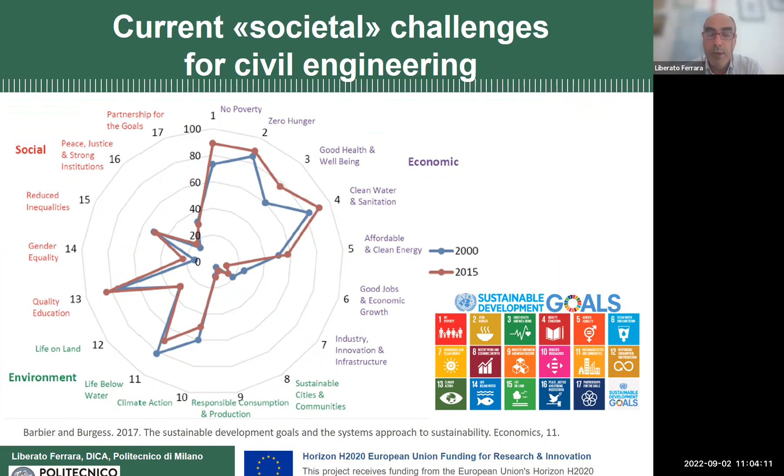Just to frame the topic: it's quite well known that we are all now targeted to these sustainable development goals by the United Nations. So I've started thinking for some time, what could be our role as civil engineers to contribute to these sustainable development goals? Some of them are quite obvious — you can go into SDG number 7, industry, innovation, and infrastructures. But as a matter of fact, there are quite some contributions we can give as civil engineers to all of these SDGs. So I will say these are challenges for civil engineers, but also for us as educators, to think about what could be our contribution to these new societal challenges.

Recently, the European Union issued this objective, the new taxonomy environmental objectives, and they are dramatically urgent. You see: climate change mitigation and adaptation, sustainable use and protection of water and marine resources, transition to circular economy, prevention of pollution, and protection of biodiversity and ecosystems.

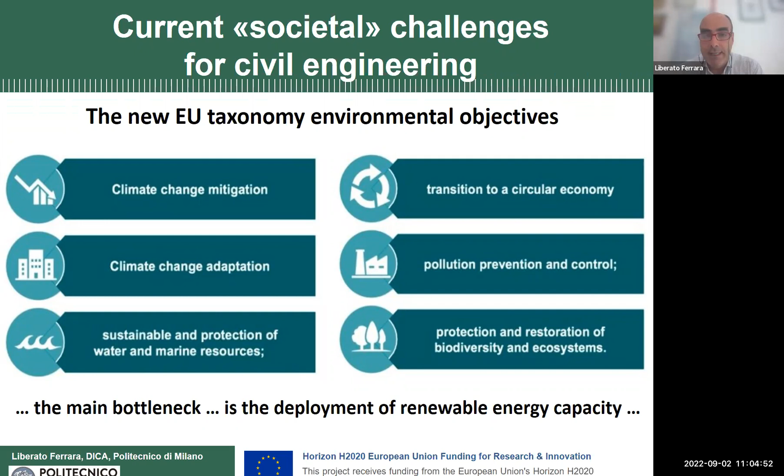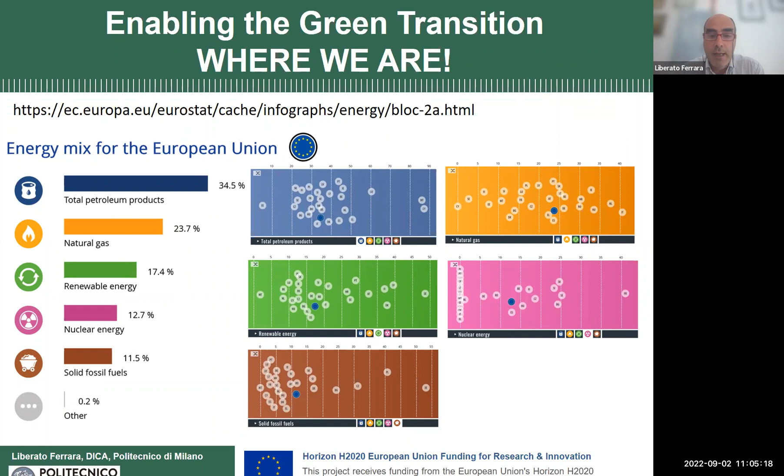Actually, there are several bottlenecks to this, but one of the main ones identified is the deployment of renewable energy capacity. When we look at this — these are European Union data — what is the current situation, the current energy mix for European Union energy? These are quite recent results, and you can see that less than 20% of our energy in Europe comes from that. There are differences among member states, but there is still quite some work to be done.

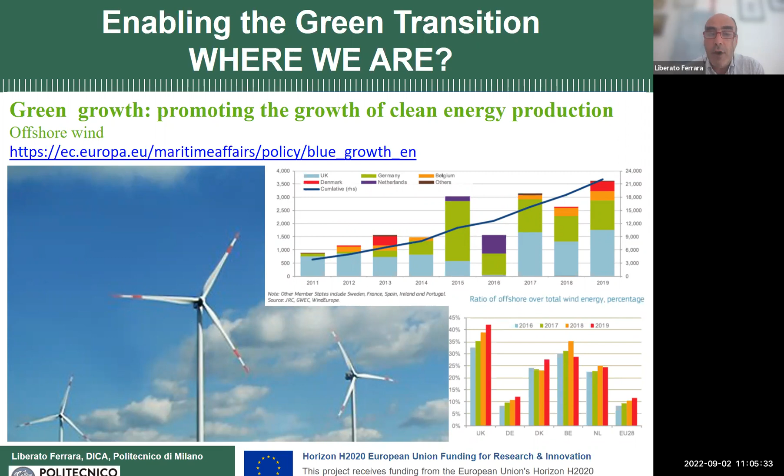Well, surely we can bring in ideas, concepts, and design methodologies about new materials, but these new materials should not only be better performing from the mechanical and durability point of view — they should likely enable us to think about the structural concept in a different way.

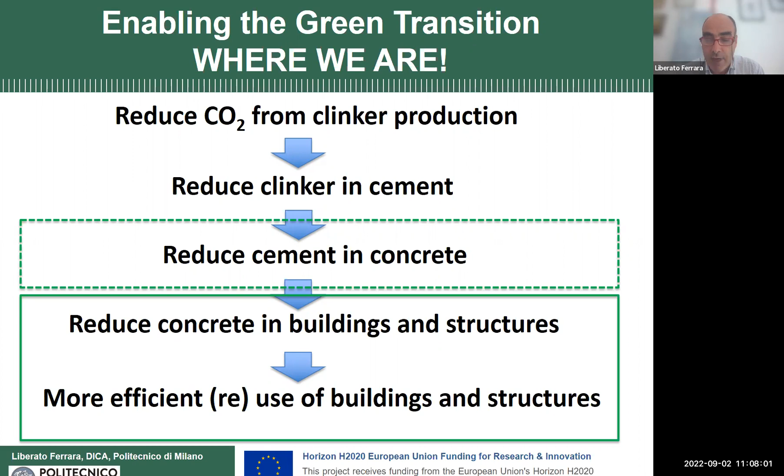So when we have talked about offshore wind, we have talked about geothermal, all these applications are in extremely aggressive environments. If we go to the sea, we know that we have chlorides; in geothermal drilling, but also in infrastructures, we may have chlorides and sulfates. So all these structures and the materials they are made of are exposed to extremely aggressive operational conditions, which include the chlorides, the sulfates, the environmental, but also the structural service scenario. We must not forget that there is a combined mechanical and environmental stress on our structures that we have to think of.

These are examples of structures which were built very recently, not more than 10 or 15 years ago. So we can really assume that these were built according to the most recent code specifications. And you can see the severe degradation that they have suffered in sea and geothermal environments.

Another aspect to consider: look at the picture in the bottom left of the slide. This is a raft for mussel farming in the Atlantic Ocean, close to the northern Spain coast. After a sea storm, the raft was completely destroyed. So the factory, the people running it, lost the infrastructure, but they also lost the harvest. It's a huge economic loss that we have to consider.

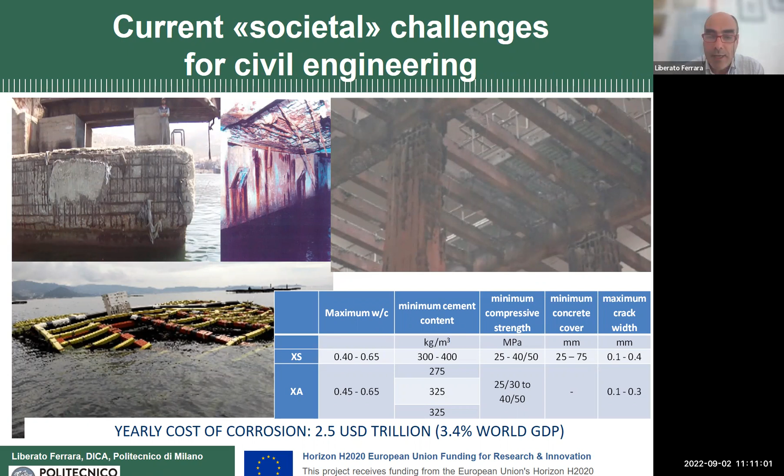So this was the context in which we started working together, answering a specific challenge issued by the European Union, for the call to which we applied and won with this ReSHEAlience project. It was about improved durability of materials in buildings and infrastructures, including offshore. We gave our project the short name ReSHEAlience, playing with 'SHEAL', because we worked with materials which have the self-healing functionality embedded in them. We believe this was a way to extend the service life of the structure, giving the materials the capacity to self-repair in a combined state of mechanical, environmental and chemically aggressive scenario.

The project has just terminated; we finished at the end of March 2022. We were 14 partners in the beginning. We lost one partner midway, but in the end we continued with 13 partners and 3 linked third parties from 8 different European countries, and the budget of the project was 5.5 million euros. These are the partners.

I had the privilege to be the coordinator of this project. We had 5 other universities or research institutes. We have from Spain, University of Valencia and CSIC. We have Technical University of Dresden from Germany, University of Malta, and Ben Gurion University of the Negev from Israel.

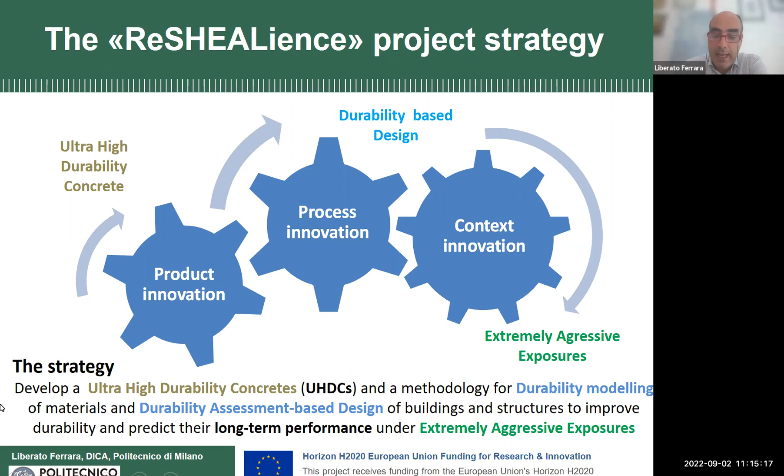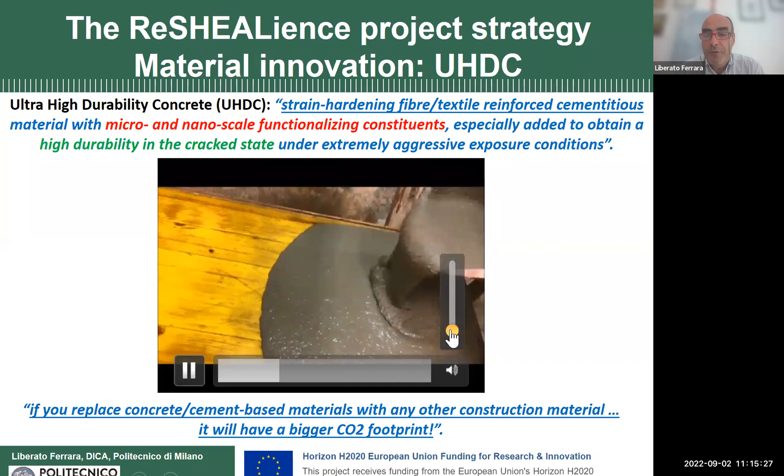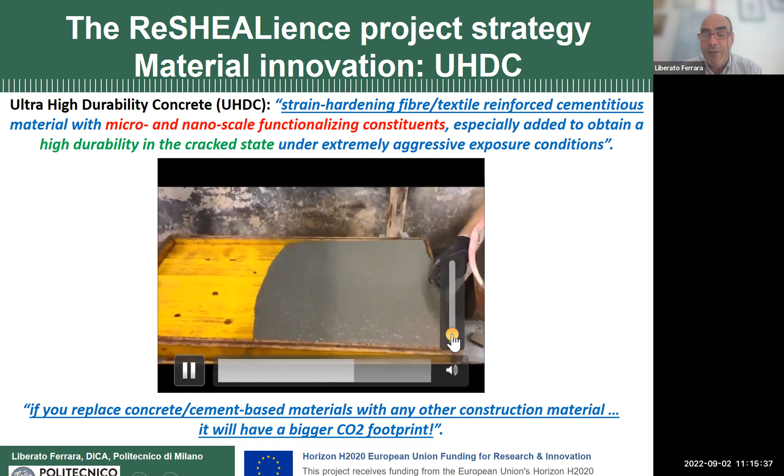So we started, as I say, from ultra-high performance concrete. Ultra-high performance concrete is a material that's quite well known in university labs worldwide. It's quite well known also on the market, but so far it's also regarded as a material for niche application, considered somewhat a luxury product, branded and so on.

So what we wanted was to say, okay, look, there is not a unique ultra-high performance concrete. It's a material that has to be designed for the specific application that you have in mind. And if you want to look at the CO2 footprint, consider also that you must have the possibility to produce it with locally available constituents. It has to be done with what you have in the local situation.

Our ultra-high durability concrete, we defined it as a strain hardening fiber or textile reinforced cement-based material. And we wanted to upgrade its functionality, incorporating micro and nanoscale constituents, having as a target the improvement of the durability in the cracked state.

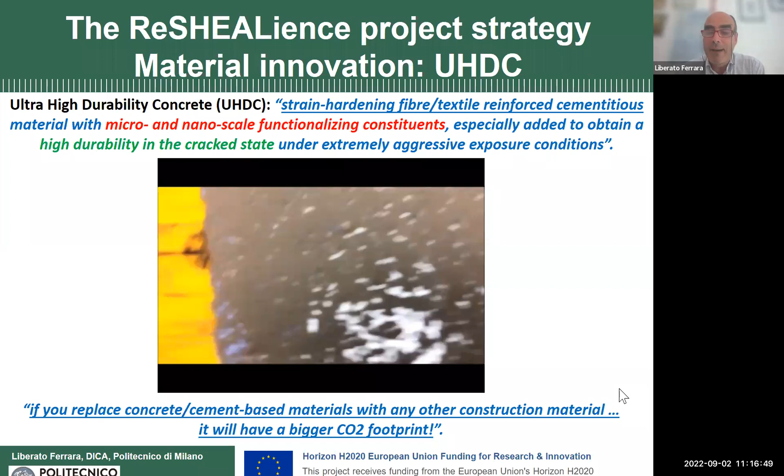And also having in mind another very important message: if we replace concrete or cement-based materials with any other construction materials, we will have a bigger CO2 footprint.

So then we went from the lab to the construction site. This is an ultra-high performance concrete cast on site by a regular construction company, trained to do this, so there is nothing exotic in doing this. And you can see the remarkable fresh state performance that we achieved on the site.

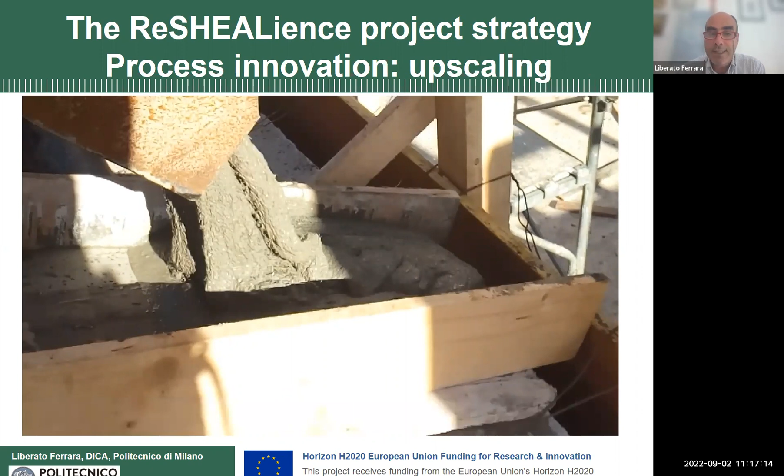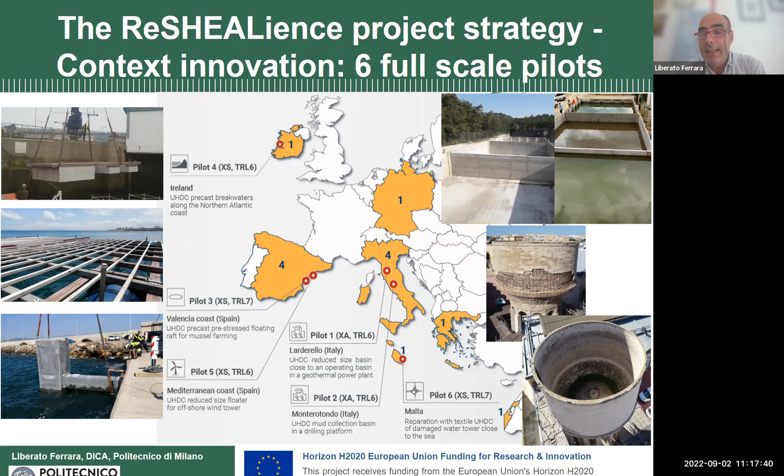This was at a pilot site that Enel Green Power made available for the construction of one of the 6 pilots of this project. Actually, we have 2 pilots that have been built; they are now in operation and under monitoring. We have 2 pilots in Italy, 2 pilots in Spain, 1 in Ireland, and all these 5 are new structures. In Malta, we have a very interesting project for the retrofitting of an existing reinforced concrete heritage structure. These are some images of the pilots and of the consortium that we visited. We will look at them in better detail later.

But going back to the message that I was delivering before, for each of these pilots, we did not have obviously the same material.

We could not have that because the conditions are different. The performance demands, both in terms of structural and environmental requirements, can be different. And the local markets are different.

For example, for the Enel Green Power project, one of the requirements was resistance to sulfate attack. So we used blast furnace slag as a supplementary cementitious material. But blast furnace slag was not easy to find in the Spanish market. So in that other case, silica fume was used as the supplementary cementitious material.

And we also have different kinds of applications because we could have discrete fibers in the form of steel fibers or other types of fibers. But in the case of the Irish pilot and the Malta pilot, we also used textile reinforcement, in different forms that we will see.

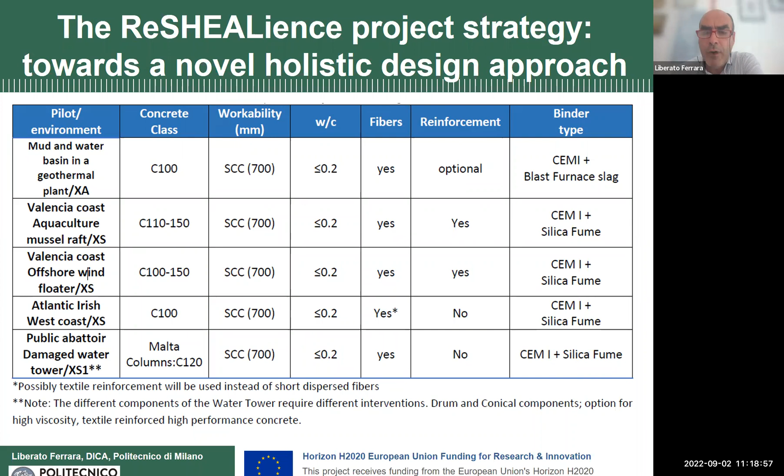These are some of the pilots that we built. These are some images from one of the Italian pilots.

This is a basin for containing geothermal water. Actually, the main intent is that it serves the cooling tower of a geothermal power plant. We built our pilot in 3 different tank compartments, each one with a different material or different structural concept.

In the farther distance from you, we have the ordinary reinforced concrete solution. If you look here on the top left, you can see that it is 10 centimeters thick to satisfy both the cover of the reinforcement requirements and some statical requisites.

Then we used one of our UHDC materials, and we built an absolutely identical tank compartment, but in this case, the thickness, as you can see from the middle picture on the top, was just 6 centimeters. So in the end, we are using 40% less material volume to build the same structure.

And then we said, okay, why don't we go for some site precasting? So we designed slabs to be then tilted up. You cast the slabs horizontally, tilt them up, and complete the basin, casting columns on site. We call them buttresses because they function more or less like the buttresses in a Romanesque cathedral.

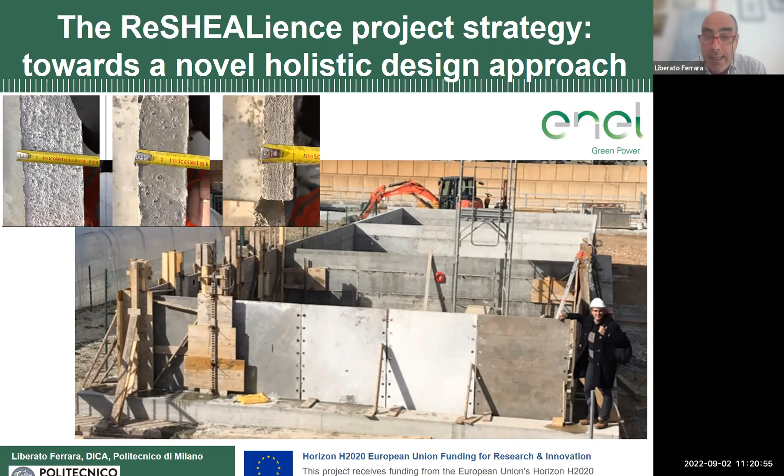And with this concept, you can see that the thickness of the slabs, of the walls of our basin, was just 3 centimeters. And it worked perfectly well.

You can see here the first load test that we made on the structure, filling them. Each of these tank compartments contains 50 cubic meters of water. You can see no signs of water leakage throughout the joints.

But most of all, if you look at this picture on the bottom right of your slide, you can see the first rectangle is the ordinary reinforced concrete after 2 years of exposure to cycles of emptying and filling the basin with this water, which is rich in sulfates. You can see that some erosion and leaching has started occurring, whereas you have no sign of leaching in the central part of the picture. This is our UHPC material.

So when you end up, I said one of the objectives is to reduce cement in concrete. And if you look at the mix design that we have employed, you see, oh my God, I have 600 kg per cubic meter of cement in my mix design. Whereas for regular concrete, I have 350 or so. So am I really reducing cement in concrete?

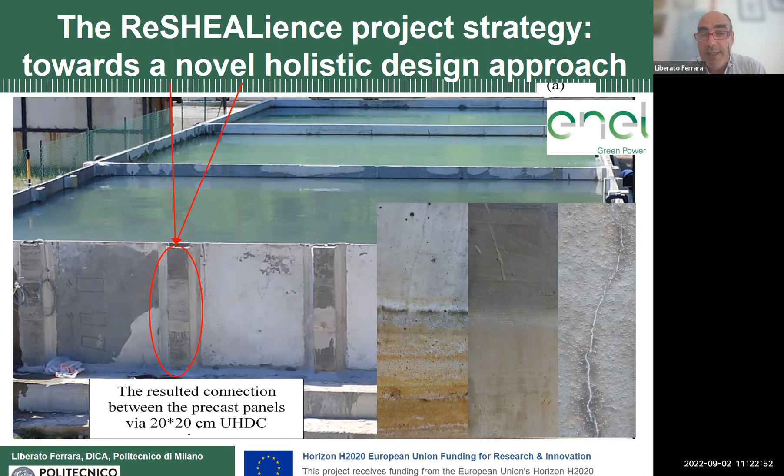Well, if I look at the cubic meter as a unit, surely not. But if I look at my structure, and I consider that in ordinary concrete I have 350 kilos per cubic meter of cement, but a 10 centimeter thickness, so I have 35 kilos of cement per square meter of slab. And I go to my UHPC solution where I only have 3 centimeters thick. Even if I have 600 kilos per cubic meter, with 3 centimeters thick, in the end I only have 18 kilos of cement per square meter of wall in my structure.

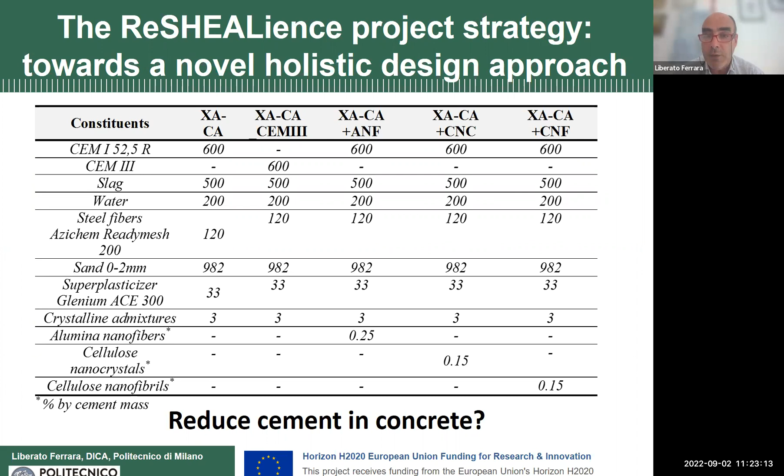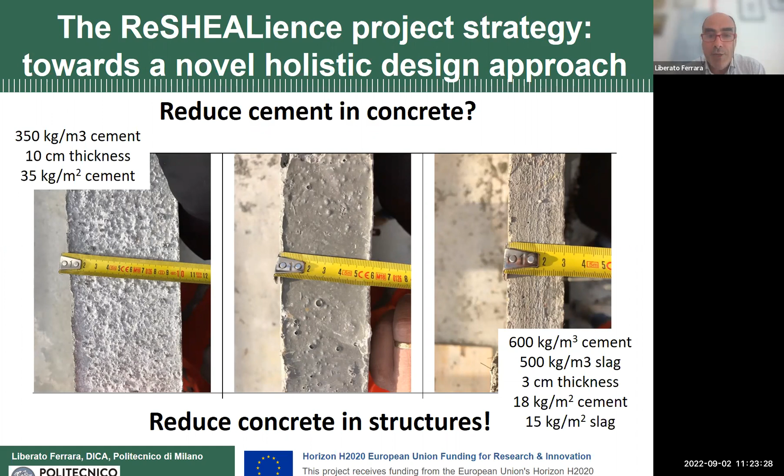So I halved the use of cement in my structure, going from ordinary reinforced concrete to UHPC material. These are the details of the calculations, focused on each of the applications we had in mind. You can see the measured dimensions of our structural elements.

Why was this possible? Well, this was possible because our UHPC material, our UHDC material, features a one-of-a-kind strain hardening behavior. These are the results of the identification tests we made employing different test methodologies. I will not go into the details.

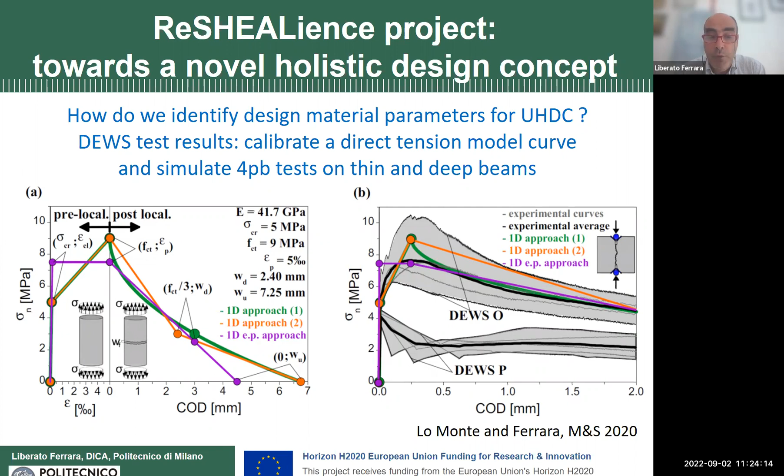There are papers cited here where you can find more, but you can see the experimental response, which we discretize by the orange curve there. You have a first cracking at about 5 MPa, but after that you have stable crack propagation going up to 9, and then you have the unstable localization of the crack, but up to very, very high and remarkable crack openings.

This allowed us to implement these constitutive laws into structural design. Actually, if we design slabs or walls, we use yield line analysis also to take into account the stress redistribution capacity of these materials, and we ended up with very high safety factors, as you can see there.

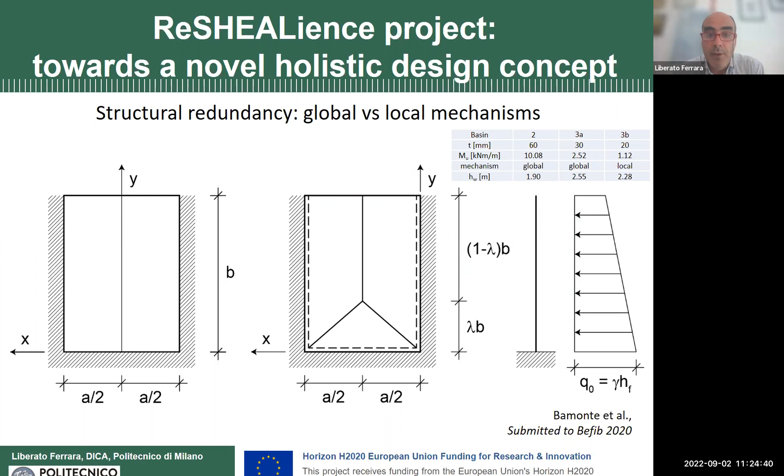Some images of the other pilots which were designed using similar materials but a different concept. This is a raft for mussel farming. This is an image of when the raft was launched. It's now used in the Valencia harbor and it's harvesting mussels.

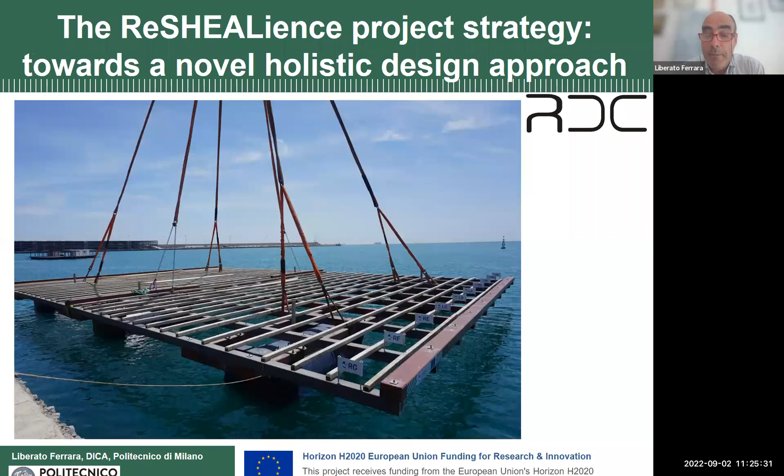Each of the secondary beams is made with a slightly different material, but also structural concept, because if you have a material with higher durability, you can also optimize your pre-stressing. And this is a raft. Traditionally they would be made of wood. Now the company RDC, who designs and produces them with their own precast branch, is proposing them made of ultra-high performance, ultra-high durability concrete. They are much more resilient in the face of aggressive sea storms.

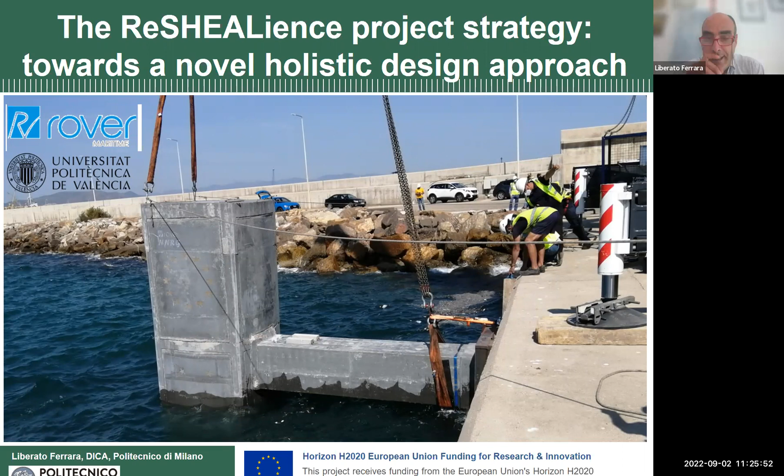This is another pilot in Spain. This is a floater for an offshore wind tower, designed jointly by the Polytechnic University of Valencia and Rover Maritime Group, and built. Now it's anchored to one of the quays in the harbor of Sagunto near Valencia. You can see here some pictures of us visiting it to get an idea of the scale.

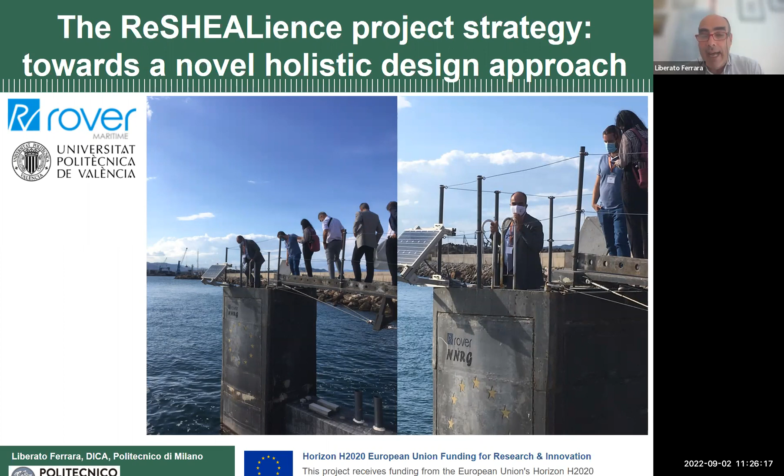This floater can be visited inside. You can go inside, and there are sensors, like on all the other structures, continuously monitoring the performance. You can imagine this structure is daily exposed to sea tides, to the waves, and to the aggression of the seawater. These are some images during the construction and launching of the Irish pilot.

This is a pontoon for a tourist harbor. You can see in the foreground the ordinary reinforced concrete solution - you can see how big that is. The other two in the back, pontoon 2 and pontoon 1 listed in this scheme, are the ones made with our ultra-high durability materials, which in this case employ a carbon fiber textile fabric, produced also in cooperation with the Technical University of Dresden.

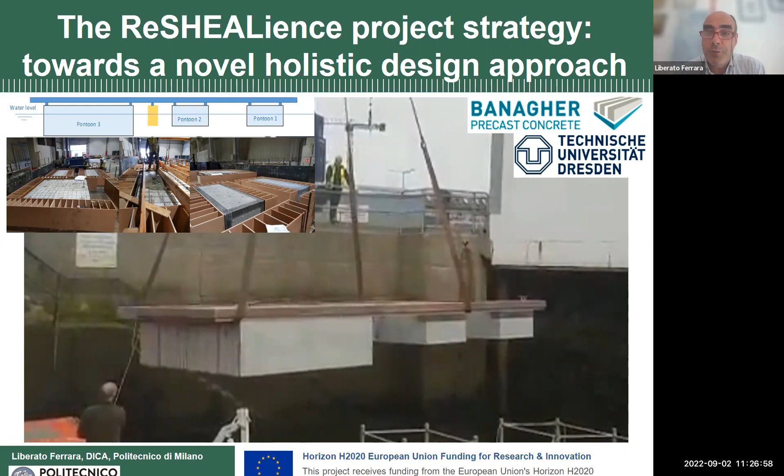The pilot was built by this Irish precaster, Banagher Precast Concrete. The pilot is now in the harbor of Galway. We went to visit it some months ago, and there are sensors monitoring it. We have a data logger wirelessly transmitting data to the Harbor Authority of Galway, who is now the owner and manager of the pilot.

And this is the example of the last pilot: the Malta water tower, in the area of the Grand Harbor in Valletta, Malta. You can see how it looked 5 years ago, when we decided to make it one of the pilots of our project - it was severely degraded by airborne chlorides, but also by the action of wind suction.

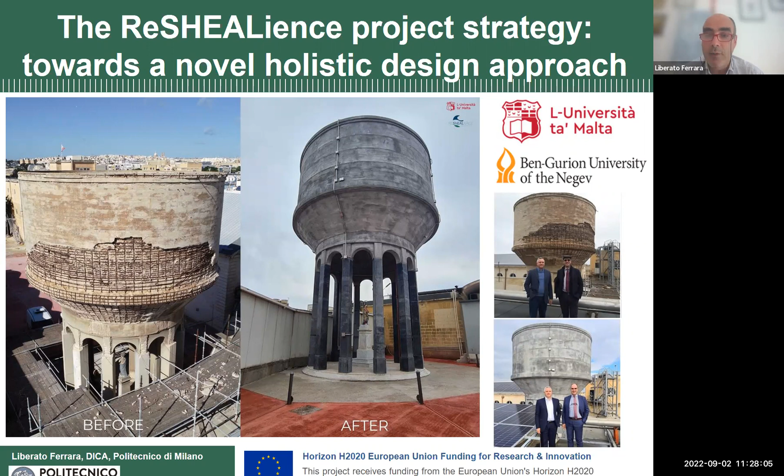Together with the sand particles and chloride particles brought by the wind, this created strong erosion on one side of the structure. You can see here how it has now been retrofitted. We used a self-compacting UHPC for the columns and textile reinforced UHPC for the drum.

Another of the applications that we have in mind is for coastal protection. It's becoming an extremely urgent need.

In Europe, we have 66,000 kilometers of coastline, exposed to coastal flooding but also to sea level rise, with a scenario which in the best condition could be an increase of sea level between 34 and 76 centimeters—this is an estimate made in Europe—but more than twice as much if emissions are not mitigated. It's estimated that about 700,000 people live in areas exposed to the risks of coastal flooding.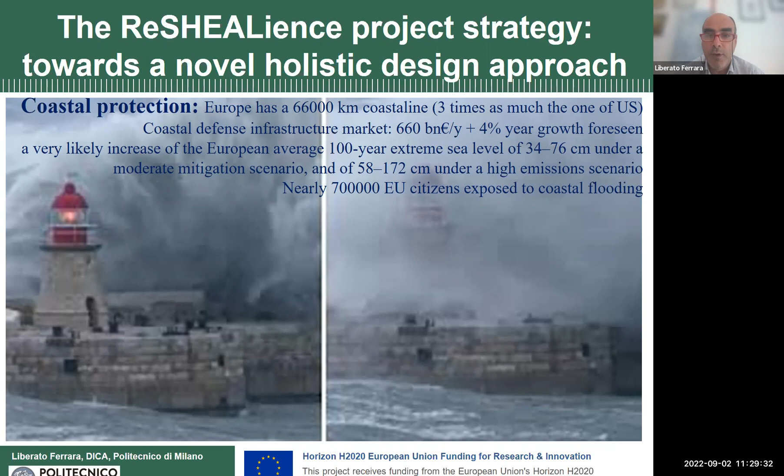So in the end, having developed the materials, we applied them in real scale structures. But what about the structural design, life cycle assessment and cost analysis beyond that? We know our materials have higher performance, so in the end we can design better, but this also comes at a higher cost in the beginning—a higher construction cost for sure.

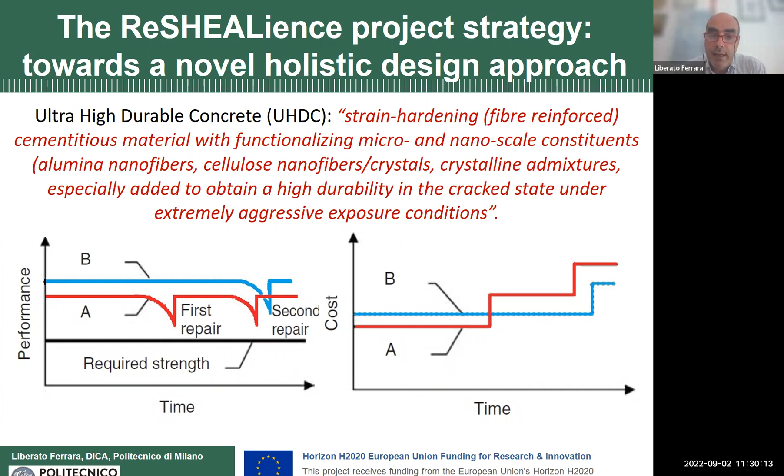But in order to really understand the benefit of these materials, we must implement what we call a holistic way of thinking. We have to think about the whole life cycle, the whole service life. How can we really see the benefits of these materials?

So we tried to develop this concept map, saying: okay, if I am a civil engineer and I have to design a structure—could be a wall, could be a slab, any other kind of structure—I have in mind, at the beginning, a structural mechanical performance, could be the resistant bending moment or any other structural capacity indicator. I design with a certain initial safety margin, but I know that because of aggression and degradation, this level of structural performance will decay over time, up to a certain point.

First, there is a mild decay. This is a classical model for corrosion of reinforcement: until the chlorides or the aggression penetration reaches the cover, you have mild degradation, but when it reaches the reinforcement, the corrosion starts, so you have a very rapid decay.

So we can implement materials—could be ultra high performance material, could be reinforcement not sensitive to corrosion. It's becoming more and more common now to think of these materials.

We do not only increase the capacity, so the initial safety margin, but what we can do is govern the speed with which the performance undergoes degradation over time, and so the time for the first maintenance to be performed—and we extend the service life.

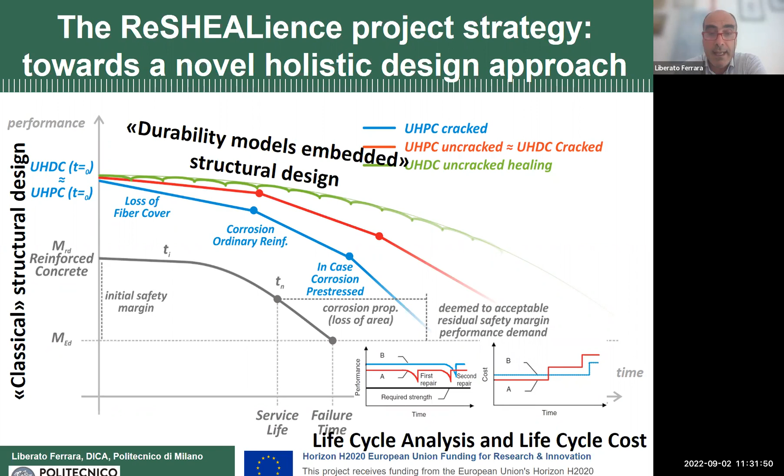So with our ultra-high durability concrete, with our ultra-high performance concrete, the design algorithm that we use is the one now recommended in the FIB Model Code 2010, but also ACI committees—the 544, which I had the privilege to chair until the beginning of this year, and the 239—are implementing this in their reports, guidelines and recommendations. Basically, we use the same approach for compression in concrete, and we use a stress block for the tension side, which is guaranteed by the strain hardening capacity.

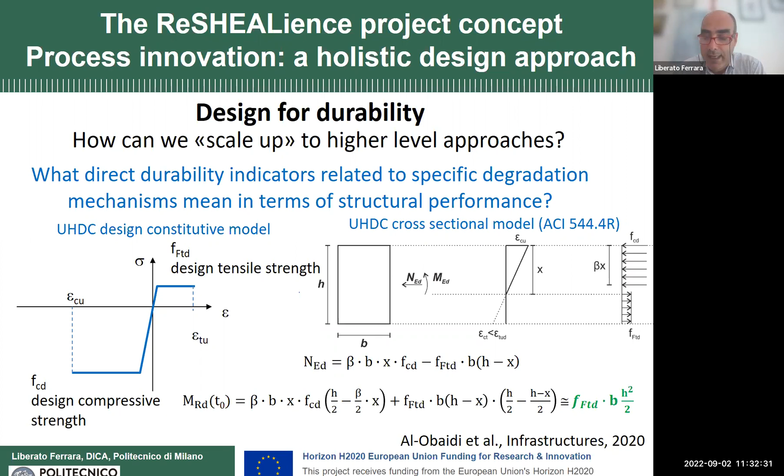So we perform usual structural design with equilibrium equations for the cross section. But then we wanted to implement mechanisms of degradation. So we said, okay, what if the chlorides penetrate or the sulfates attack our cross section? Well, we will start losing capacity.

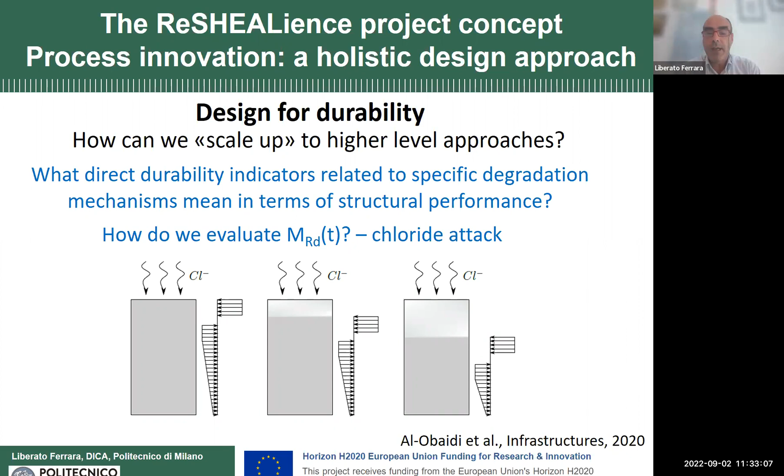This was a very severe assumption that we made. In the beginning we did not have data, so we felt confident using it. We said, okay, let's simply remove the attacked layer, so we have a reduced cross section—basically what we do when we perform fire design with concrete, fire design with timber, and so on.

But in the end, we just had to implement the chloride penetration mechanism, for example, or the sulfate mechanism, into the structural design equation. We lose progressively something. This was for chloride—this is the Fick's law—and this is for sulfates, depending on whether you have leaching only or erosion as well.

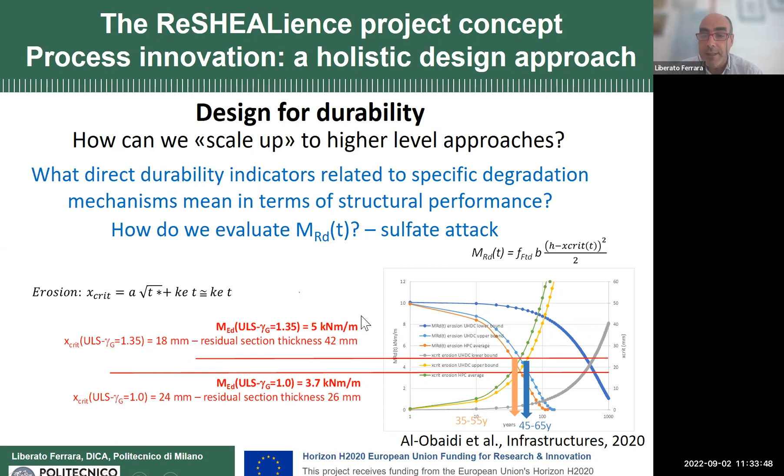But in the end, we realized that even with this material, even with this very severe assumption of removing the layer, we went from the orange or blue curves, which are for ordinary concrete, to a much lower degradation of structural capacity over time with our materials. Then we wanted to be more intellectually earnest, I would say.

It's not exactly that we are losing completely the layer which is attacked. We wanted to see how the combined mechanical and environmental action affected the constitutive law of the material.

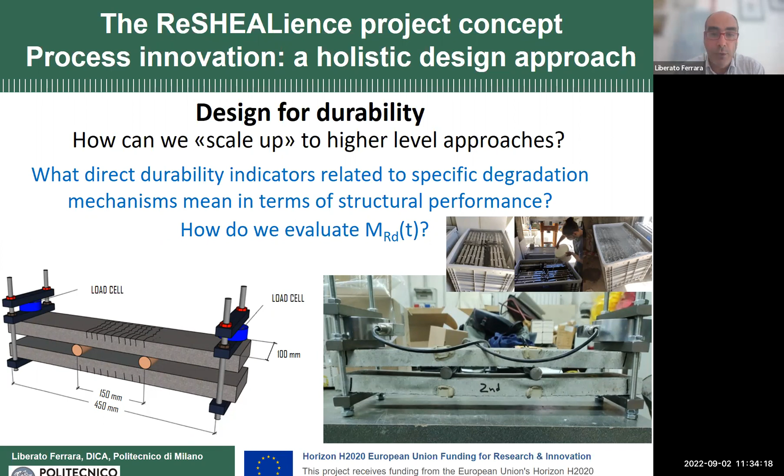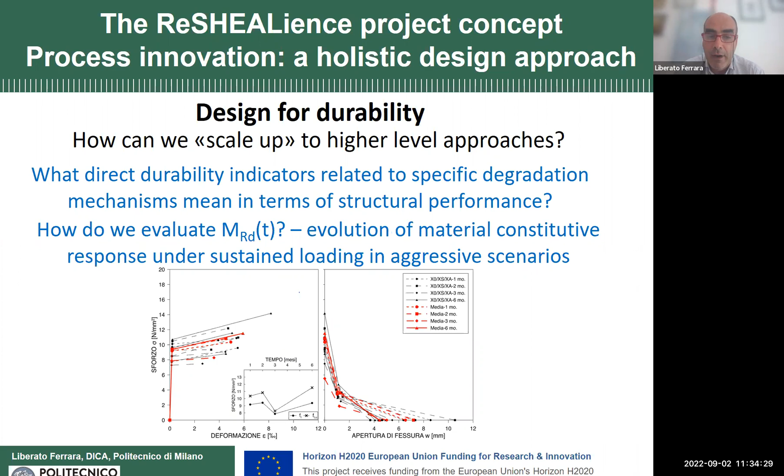So we developed a setup to keep our beam specimens under sustained stress while they were being exposed to chloride solution, to sulfate water. And so we identified how the constitutive laws change over time, and we performed experimental identification up to 6 months.

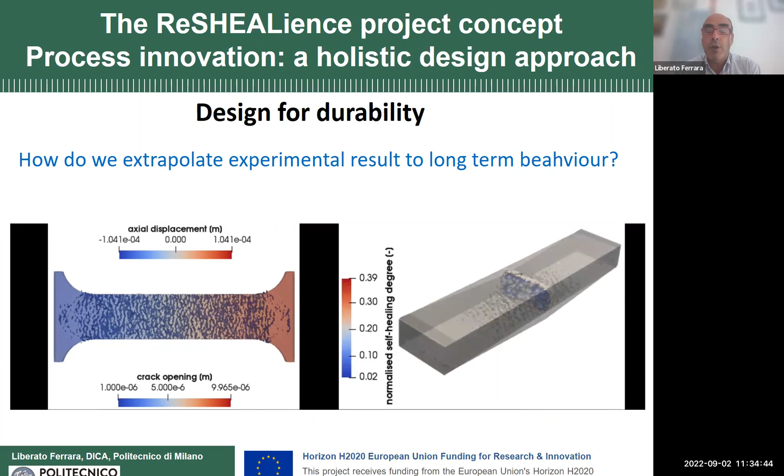Then we went with some kind of numerical modeling. You can see some of our numerical model predictions for the tensile strain hardening capacity and for the environmental exposure, because we want to project the validity of these results up to long-term exposure. We are currently performing the analysis.

Also, to extrapolate our experimental results to long-term behavior, we started to use artificial intelligence algorithms in the analysis of our data and of the literature data, because these materials, in some cases, are new. So you do not have statistics for the material strength or for other material properties, material performance indicators.

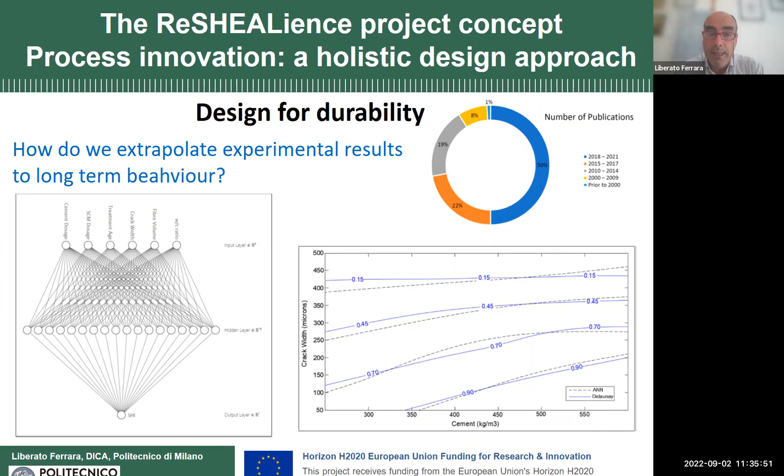And we ended up redesigning our structure, and you can see these are some results of collaboration, which also continued with the Marie Curie International Training Network. We went progressively reducing the structure size using our ultra-high performance materials.

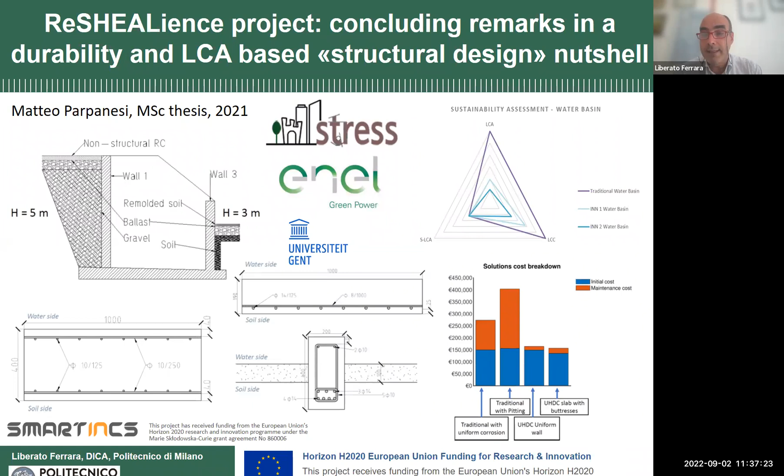So we end up with comparable construction costs and much less maintenance, basically almost reduced to the essential, over the service life. We consider different scenarios, 50 or 100 years. This is to highlight the sustainability feature, both environmental and economic, of the material and structural concept that we developed.

And then we interacted, as I said, with the perspective of the end user, which was Enel Green Power. We said, okay, we can go up to no maintenance in 50 years or even 100 years. And they told us, well, look, in our case, probably after 30 years, the geothermal pit will be completely exploited. So what we will have to do is go from that site to another site, which is not much farther away, but we have to relocate it.

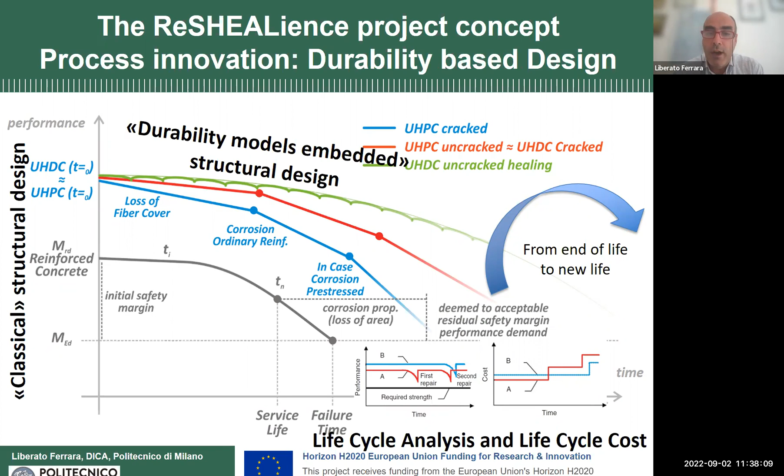So in the end, we said, okay, what about if we think of when the service life, the real exploitation life of the site, is over? What if we think of crushing the concrete from the structure that we built and use it as a new constituent, as a recycled constituent, into the new structure which has to be built? So we addressed the recyclability of the materials that we had to build.

And we also tried to artificially carbonate some of the recycled aggregates to see whether this environmental exposure was affected. And also in this case, we had no decay of the performance.

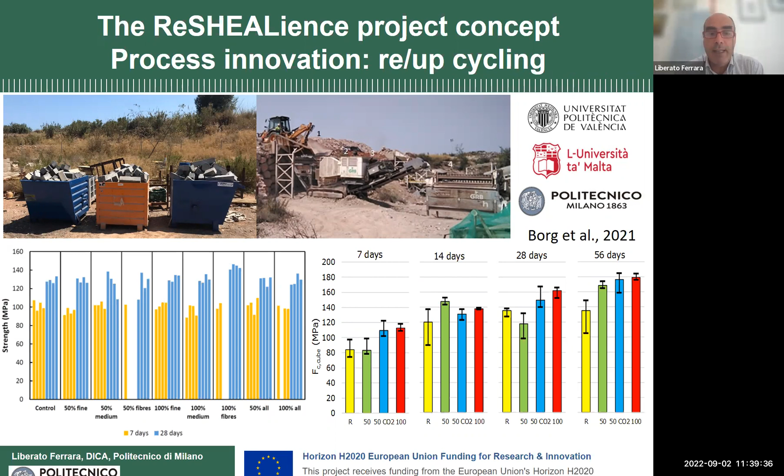And now with colleagues from the University of Malta, we are investigating, with some good results, the possibility of using these recycled materials also as a partial replacement of cement, because attached to the grains there are a lot of anhydrated binder particles which can further provide binding capacity. What was interesting in our case is that using recycled UHPC as aggregate, we also kept the self-healing capacity.

These are some results of a PhD thesis now going on jointly between Politecnico di Milano and University of Ghent, and the self-healing capacity is remarkable.

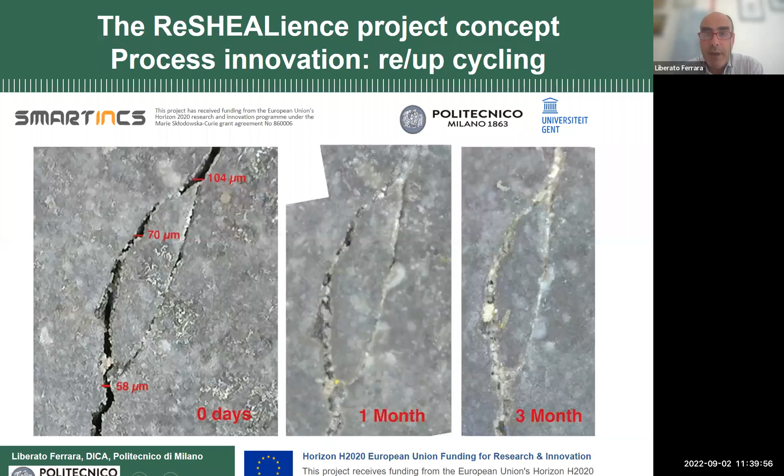So I'm coming quickly to the conclusions, my time is almost over. Most of these results you can find on the website of the project, which is still active - we have contracted to keep it active for 5 more years. You can visit it at www.uhdc.eu. On the page there is a specific dissemination page where you can find our publications. We published more than 20 peer-reviewed journal papers, and they are all open access, so clicking on the link you can access the paper. For many of them there is also an open database with a link that redirects you to the data of the paper, which can be reused for further research purposes.

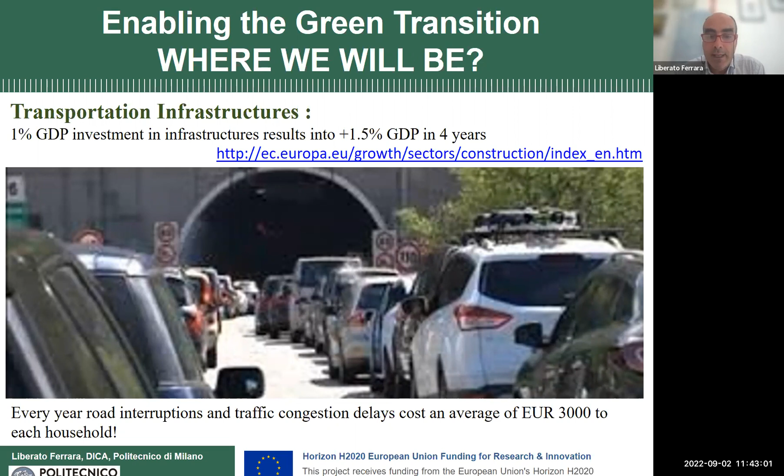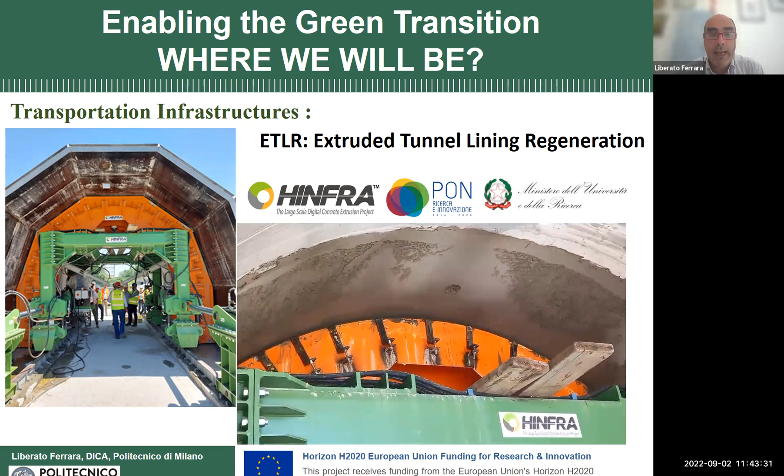Finally, we need to involve people in order to understand the benefits. This was an initiative also launched by the European Commission, the New European Bauhaus. We need to involve people to understand the beauty and benefits in terms of sustainability, social inclusion, and the value of designing and building with new advanced cement-based materials.

And with my whole research group, I want to thank them for the work we have done together, and thank you for your attention throughout this talk.